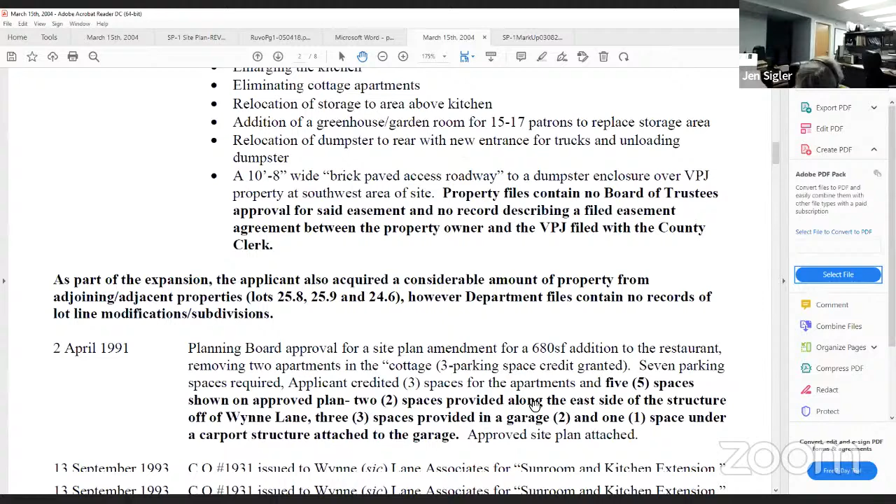There were 5 spaces. Okay. I'm sorry, I'm just having a brain fart here. And I'm on YouTube, I don't have the memo. I just closed it, but shoot. On the second to last page. Wait. Yes. Okay. Right. Sorry. I'm back on.

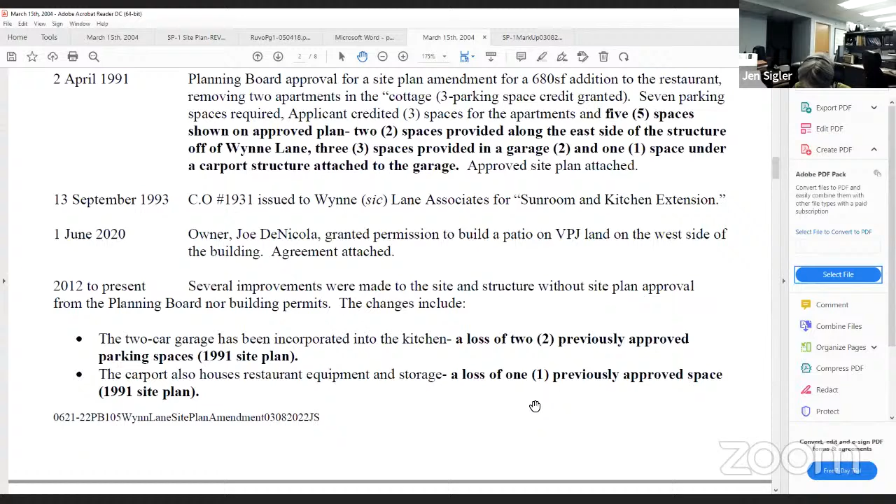So 10 spaces for the attic expansion, 5 spaces for the expansion into the garage, I'm not including the carport, and 3 spaces for the spaces that were lost as a result of that action, and spaces that probably should never have been approved in the first place. Can we go over that again, please? Yeah, absolutely.

So you said 10 spaces for the attic. Yes. So we're using the calculation 1 space per 100 square feet. The attic is a little over 900 square feet. That is restaurant space that would require 10 spaces. 5 spaces are for the area that was expanded into, that includes the prep area that was the former 2-car garage, and 3 spaces for the spaces lost, the 2 spaces lost within that garage and carport.

But just a quick review, we have no record on whether or not the 2 spaces were already in the calculation inside the building. They were, correct? In the 1991 planning board approval, they gave the applicant at the time credit for the cottage parking spaces. And they also allowed the applicant to provide 2 spaces, whether they were public or private, I don't know, within the garage, 1 space within the carport.

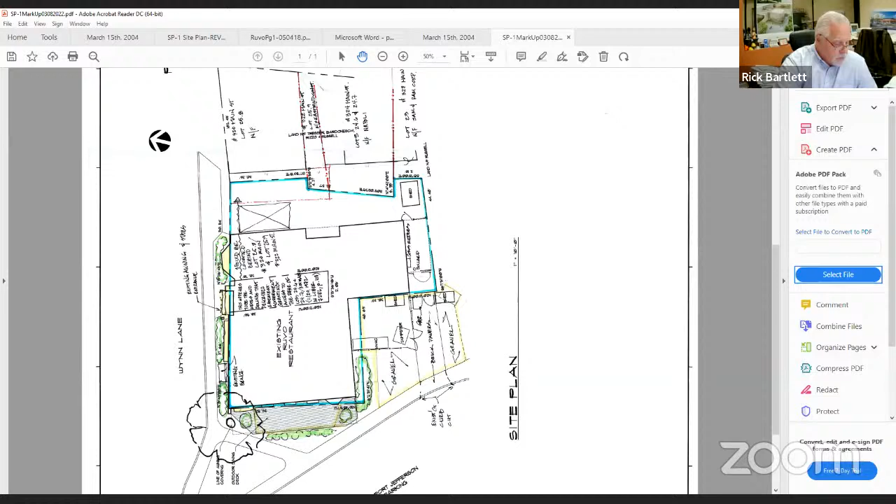So what's going to happen? Are you going to write recommendations to us? Well, we need the improvements to the survey and some of the other things that Jen mentioned. Rick, do you have that staff report from Jen? I do. Can you work with Jen to do all of the recommendations she has in there, and then we can look at the final result at our next meeting? Yeah, that's not a problem. Okay, good. And in the meantime, you guys can work on that easement, right?

All right. Do we stay on the top of the list now that we've been heard? Because the last time it took 6 months to be seen. Once you get information back to us, we put you on the calendar, as long as it's received in enough time before the meeting. It can't come in the day before. I understand that. We require at least 2 weeks for a resubmission to review. So if we wanted to be on the calendar for next time, we would have to have it in within 2 weeks from today, correct? Yeah. Okay.

And in the meantime, I think a discussion with the mayor, the Board of Trustees, yourself, your staff, about what land you want included in the land use agreement and how that's defined. To your knowledge, do they do that as a formal request in front of a board meeting? Eventually it absolutely is done more formally with the board. I know that, but how do you get the ball rolling? It's a good question. Call Barbara? Yeah, I would suggest that's a great place to start, Barbara. Yeah, all right.

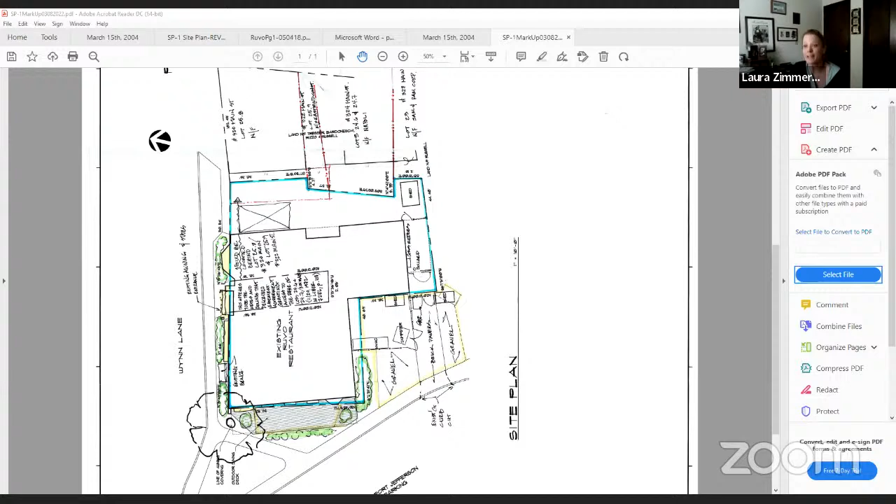Thank you. Yes, and Joe, thank you for your willingness to bring all this into compliance. Yeah, I don't want my kids to have to deal with this problem. You know what I'm saying? So, I try to do everything above board, as best as possible. I inherited these problems. Greatly appreciated, very much. All right. So hopefully everyone can be reasonable, and I'm willing to spend some money, but everyone has to realize I've just been clobbered. And I'm keeping a lot of people employed down there.

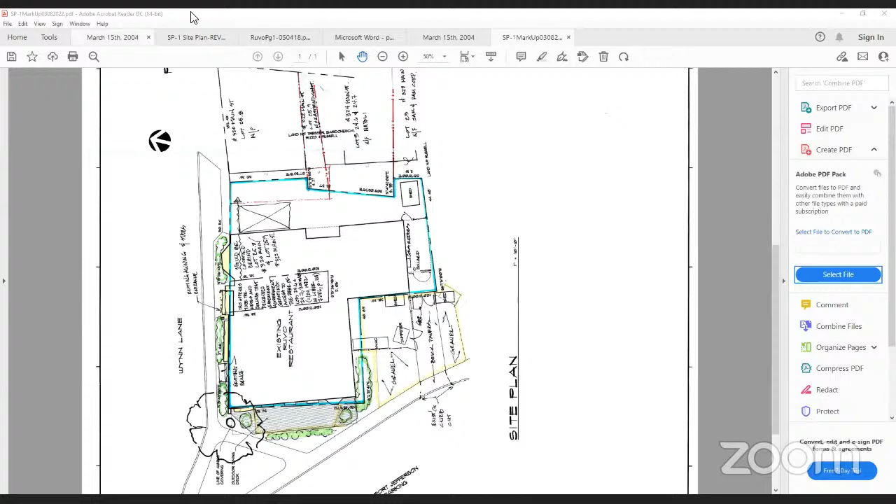And next item is Mather Hospital, continuation of discussion of the site plan amendment. Lisa, do you see anyone? I do see Anthony Guardino is in the waiting room. I don't know that he wants to be brought in as a panelist. No, I believe Mr. Guardino indicated that he was going to just be listening in. When I spoke with him earlier today, he was at first surprised that they were on the calendar, a little alarmed because they weren't able to get all the responses from just last weekend already.

I assured him that the planning board did not expect to have full responses from our very lengthy hearing in one week's time, but rather that this was a continuation for the planning board to continue to get their head wrapped around the project, to continue to go over any outstanding issues. Since we have the availability of the meeting, there's no reason we can't keep working on it while we wait for the next open public hearing. So I believe Anthony is listening in. He's well aware that this is a work session, and I believe even in Jen's conversations with their engineering team, they're not going to be on.